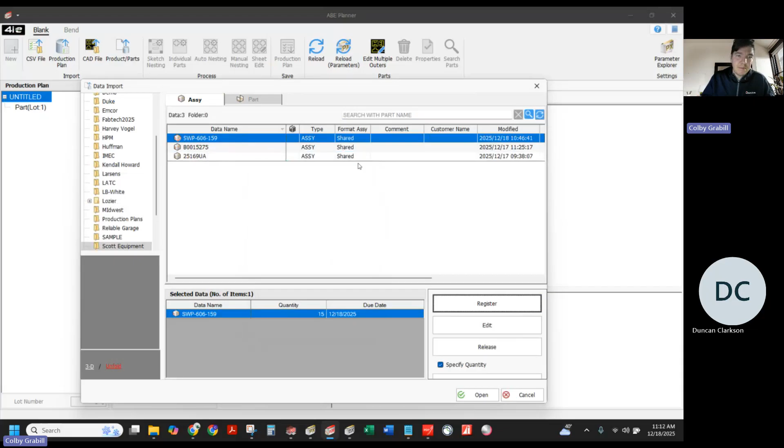So this is kind of where you spend most of your time after you've processed data through. So here's our different assemblies. And what I can do is, like, for this one here, I can say, hey, we're going to build 15 of this assembly. This one we're going to build 10 of. And then this one we'll build 10 of as well. Just put in 3. The rates are on there, but it's just like that split. Okay.

So now it knows the quantities of each of the components in those assemblies. What it's necessary for, sure. I'm guessing some of that big trough section might cause some issues with that, just because it's probably bigger than most sheets. Yes, yeah, it does not nest properly, but I can get it on there for the demo purposes.

So see here, it automatically has all the material associated with it. It knows the thickness of every part. It knows what cutting condition to use for each of the parts. And it knows how many of each part we need per assembly. So it knows this one's 16, and then over here it has the lot size. So it knows it's actually going to build 240 of these, but there's 16 in one kit, basically.

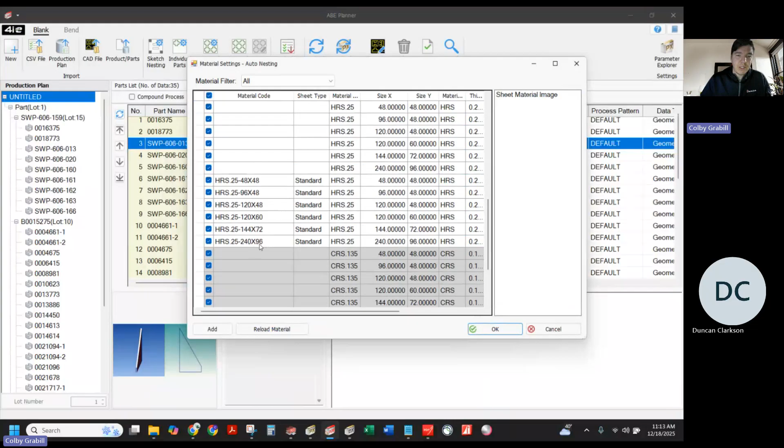Nice. Then we do go into our auto nesting. It's going to show us our material library. So we can choose what size sheets we want to allow it to nest on. And then go. Yes, I could have switched it to a 6225 machine and it would nest those parts automatically, but you'll see kind of what it does anyway here.

And with our software, as far as the nesting goes, it does a full 100% done program following all those different preferences. So it does our nesting, it'll do all the etching, it'll do all the remnant cutting, etching of remnants, slug destroy. It does the entire program, and then we make changes if we need to.

So it takes a little bit more time up front just in this green bar moving processing, but keep in mind that it's just making programs for everything. It's building a full schedule to run that hopefully we don't have to do a whole lot of changes to, because we've set our preferences up well. Right.

And then if you have a leftover remnant, does it have a means of labeling that and storing that so we know this remnant exists and can be used in the future? Yeah, so as we make remnants, it etches the remnants with that information, and then it throws the remnant back into our material library for future nesting.

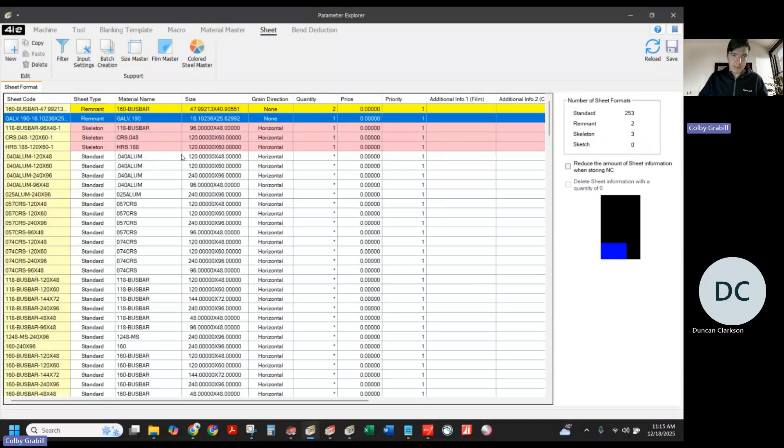I'm guessing, again, parameters and whatnot, it knows how to program the laser so that it's balancing the heat being output into the sheet, so you don't get warping or minimize the warping. Adds tabs so everything can be moved in and out pretty easily. Yeah, it has all the tabs, slug destroy, all that sort of stuff.

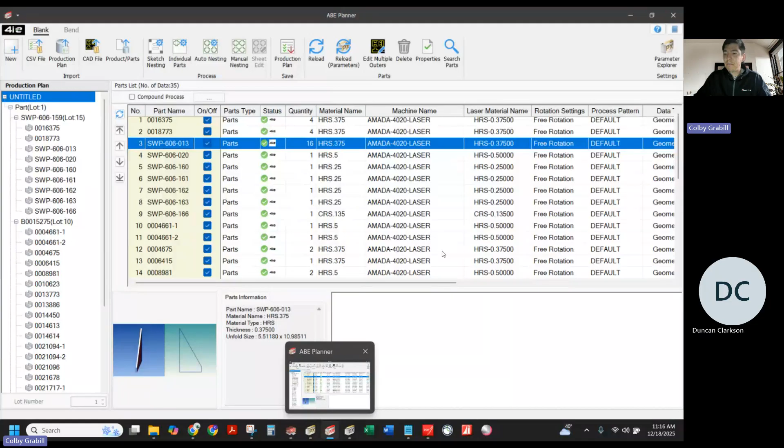As far as heat dissipation goes, that's something that you choose to enable or not. So it'll do skip cutting, so you can tell it, hey, I want every pierce to be 30 inches apart from each other. Now, if you do that, obviously that might increase your runtime. So some people turn it on just when they need it, and then they leave it on standard. Otherwise they kind of get some awkward running sheets. But yes, if heat dissipation is critical, that's something you can enable.

Either for every sheet or just particular material thicknesses, or just on a case by case basis. Right. Yeah. Sounds good. So this is a pretty large group of parts being nested here. So we got several sheets. This table on the right is showing all the different sheets that we're running.

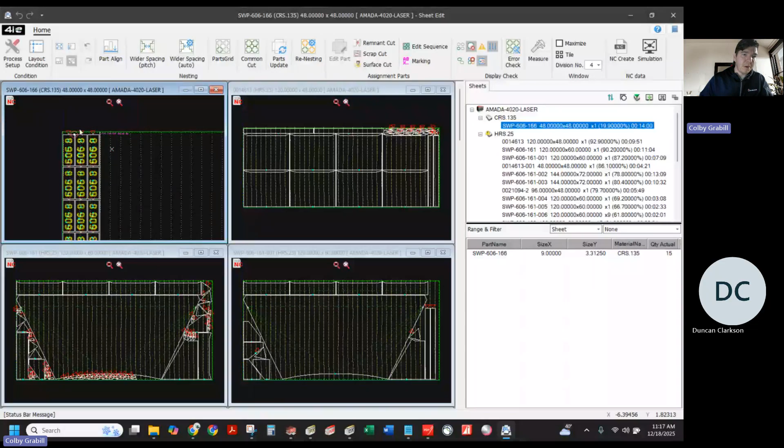This is telling me there is a part that's greater than what we can nest, which you probably expected. We'll look at that part in a moment. Here's this part. This was kind of a unique thickness, so we put it onto a smaller sheet and nested all the parts we needed. It tabbed those parts in, and then it etched the remnant with the material type and thickness, as well as the size of the remnant. That's kind of the first sheet that we're looking at.

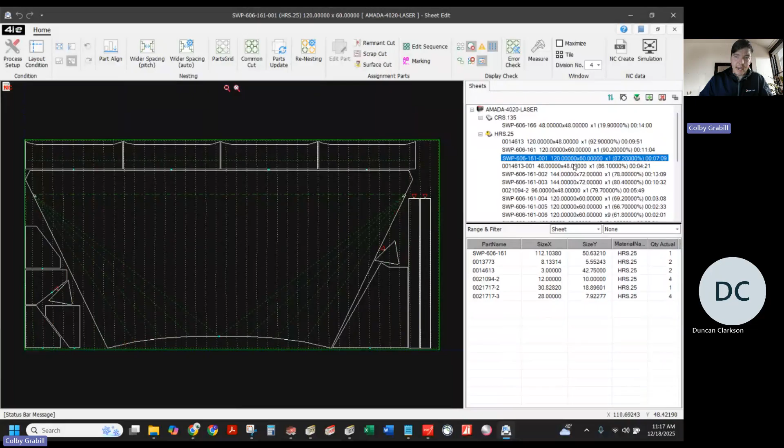That was the 10 gauge, and now for our 1/4 inch sheets, see the red triangles, those are tabs. So the smaller parts, it did place tabs on it as needed, and the larger parts, it does not. This is just kind of looking at how these nest layouts look. Go through these different.

And I have it looking at several different sheet sizes to get the best utilization. So you see it's jumping around between 120 by 60, 48 by 48, 144 by 72. It adds a little bit of nesting time, but it does create better overall sheet utilization for the entirety of the nest. And of course, we program in whatever sheet size we typically order and have on hand. So look at that. Again, etching and remnant cuts being created.

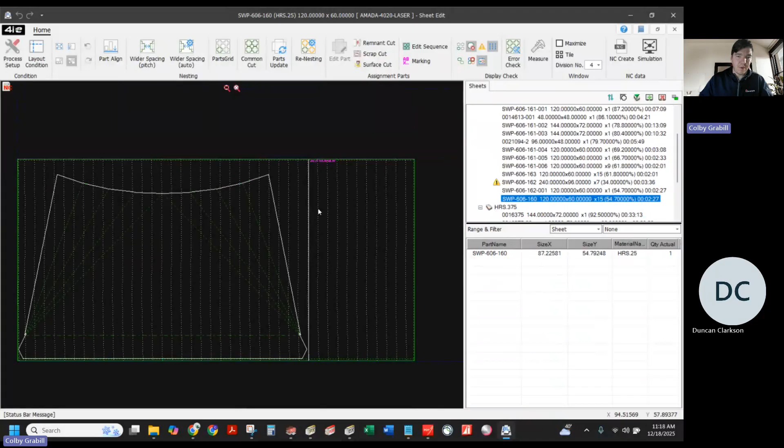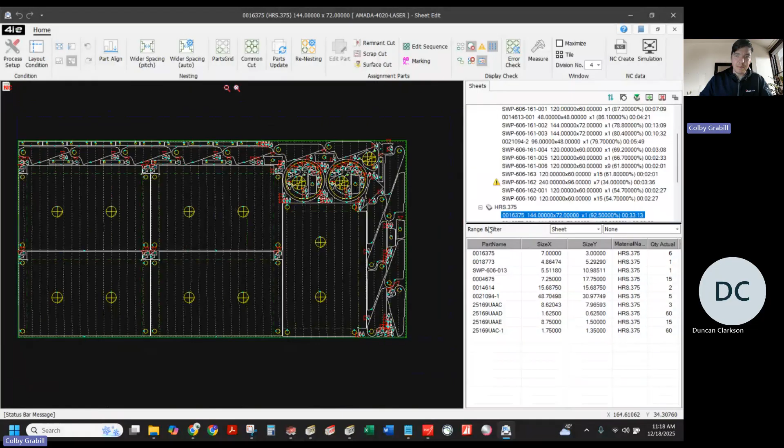Now for our 3/8, for some of these holes where it's not sitting on enough slats to be safe, but it's too big to drop through, it did automatically apply the slug destroy to that opening. It does do nesting of parts inside of parts, kind of infinitely as able, as well as some slug destroy options. So this is our couple of different nesting layouts that it did here. And again, it's got tabs on the smaller parts that need it.

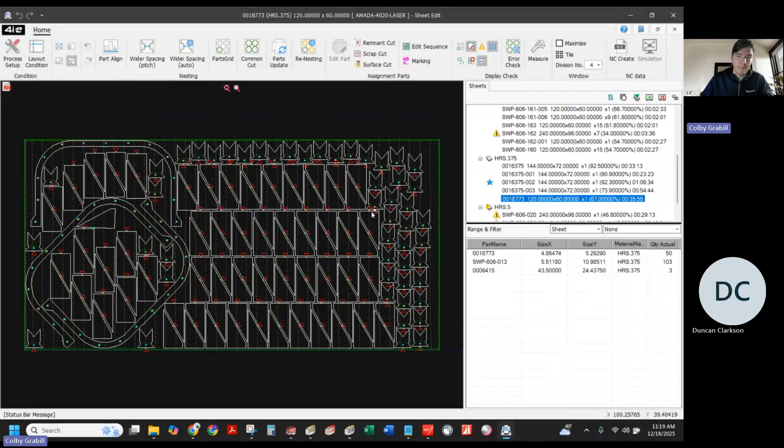Like this one here, wider spacing auto, it just kind of barely stretches the parts out a little bit further, gives you a little bit more space if needed. But these parts laid out really nicely for the nesting parameters here. It's a pretty good sheet. You might want to do some common line cutting. If you wanted to do that, you can do common cut and just grab those edges and create some common cut nests. And then here's the 1/2 inch parts that it laid out.

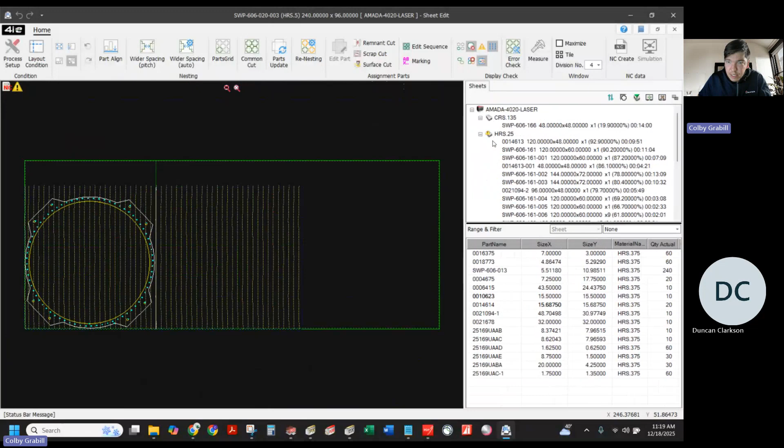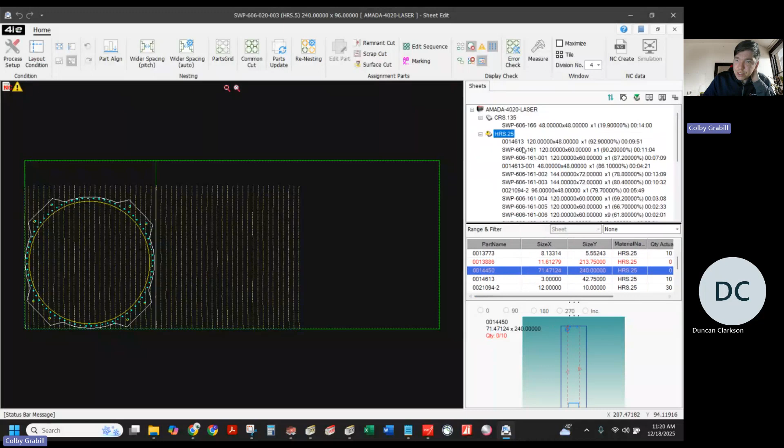Now, if we go up to the 3/8, or is it 1/4 inch? Yeah. So see the parts in red, that's indicating that they didn't get nested because they're too large. If it's black, that means we got the right quantity that we requested. If it's blue, then we have more than what we requested. And if it's red, that means we have less than what we requested. So this is saying we planned for 10, but we got 0 because it's too large to fit on a sheet. But if we just go up to our 1/4 inch here, we'll add a sheet.

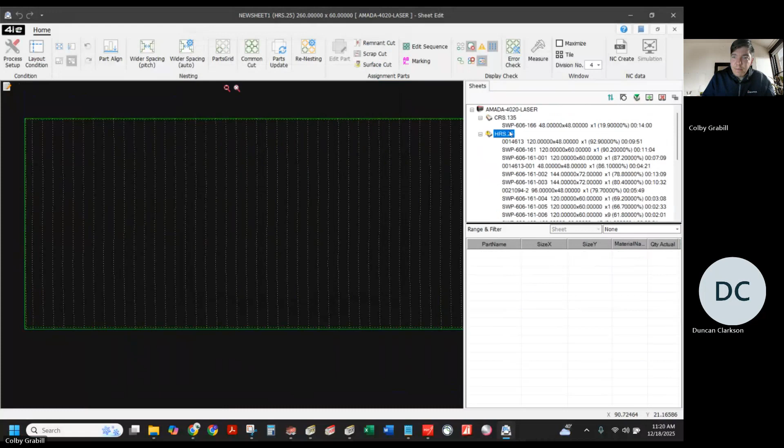And I'll make it an exceptionally large sheet. Doesn't fit. Larger. All right, so now I can grab our part here and drag it on. And we'll rotate it so it fits. Oh, it needs to be a little bit larger yet. Big part. Yeah, this is one we cut in 3 parts. Okay, yeah.

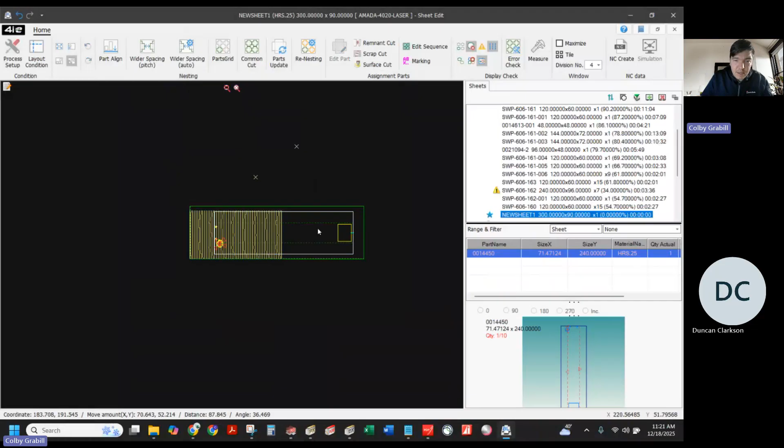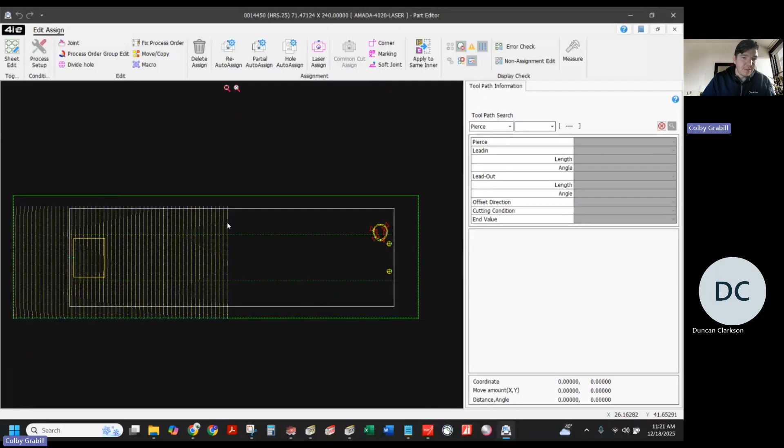Okay, so we've got it laid out on here, so it's at least cutting in a theoretical world on a monster machine. Yeah. But just out of curiosity, are those dashed lines that I see on the left side where the slats are located? Yep, the yellow lines, those are slats. So I've got a sheet on here that's larger than the machine table, so that's why those slats stop at that point.